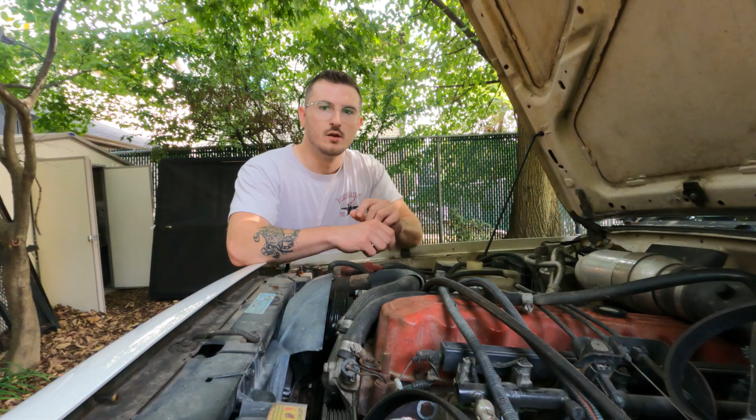So I have always run a super tight belt on this truck. I've had this truck for probably 5 years at this point. The main reason for that is because I am a firm believer in XJs being taken care of, not being shit boxes, looking nice, driving nice, you know, all that. So I put a lot of time and money into my truck.

And one thing that has always driven me fucking crazy is when, and this happened a couple times, I'll be out there wheeling or camping with my friends and people I don't know, people with big expensive Tacomas and 4Runners and all these other trucks. You turn the truck on and boom, there's that horrible shitbox squealing belt sound. Hate that so much. Everyone's turning their heads, oh, whose piece of shit truck is making that noise? A lot of you probably know where I'm coming from. So anyway, not really a big deal, but just something that I just can't stand.

So the easiest solution to that problem was always to just tighten the belt up. I've read a lot online, people run the belts tight. I know people who run the belts tight, so that's just what I've done. I've always cranked these belts down super hard and never had an issue, never had a squeal. Everything was all good. Up until about 1 year ago, when I pulled into camp and my truck sounded like it was going to explode.

At the time, we thought the AC clutch was going bad and that was making the noise. So I pulled that out and replaced it needlessly. That wasn't actually the issue. The issue was the fan pulley was actually cracked and allowing the pulley to flex as it turned and was making a pretty shitty noise. It actually had cracked in between each of the 4 bolt holes and was actually in 2 separate pieces, although the way it broke, it was still held together and it didn't come apart, luckily.

But unfortunately, that was not the case because this fan pulley, unlike my first one, didn't just crack, it literally exploded. Probably can't see this very well. See that thing right there that looks like shrapnel? Yeah, that's not supposed to be like that. I'm gonna take this thing out and give you guys a better look at it. Here it is without the fan shroud on it. Now you can really start to see the carnage. Yeah, that is no good.

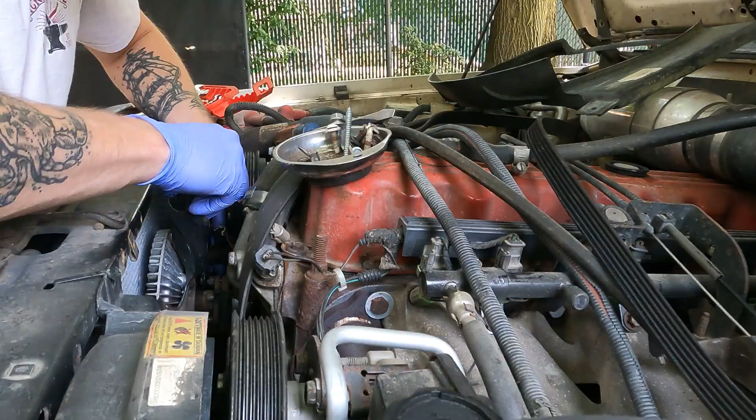Alright, here it is. Ooh. Yeah, actually, very interesting. It looks like it broke the exact same way as the other one did, because the center became detached. Let's see if I can get it out.

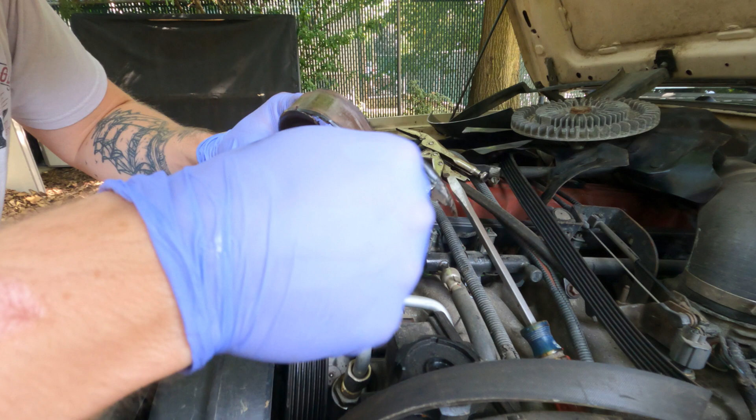You can see that the center sheared the same way the last one did, but this time it failed much more catastrophically and the whole thing just kind of exploded. I'm sure it whipped around, got caught on something, got bent backwards, and that was that. Nope, time to put a new one in.

Alright, so here's the new one. It's not actually new because from what I could tell you can't actually buy these anymore, so this was a used one off of deadjeep.com. Just cleaned it up, hit it with some paint. So you can see the way that these are designed. Your belt wraps around like that, right?

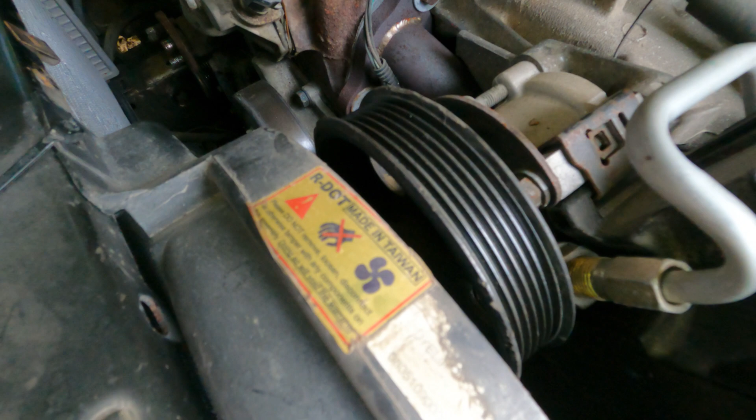And when you tension this belt, your belt is pulling on one side of the pulley, right? So the pulley is fastened here and being pulled this way here. So the rest of the pulleys on the motor, you could see like the center of the pulley is in line with the belt, right? Center is in line with the belt. That one is actually similar to the fan, but

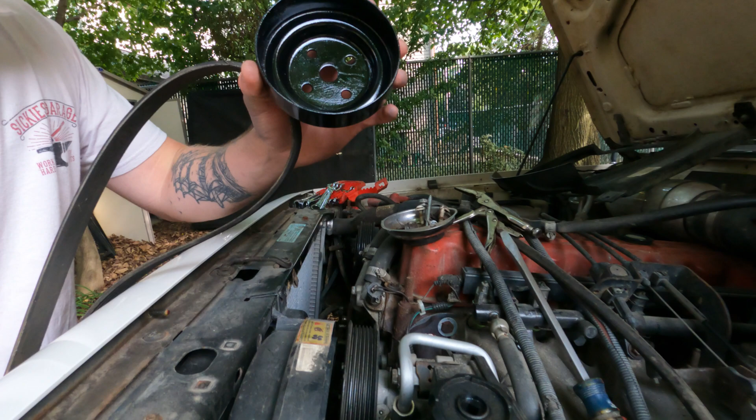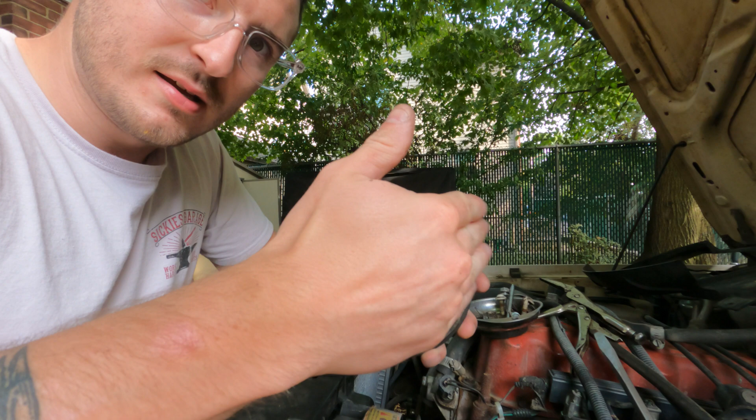the center here is not in line with the belt, your contact surface for the belt is pretty much cantilevered away from where it's fastened, right? You've got like an inch cantilever, so you're pulling on this with the belt, you have increased torque on it because of that cantilever, and you're flexing it. So every rotation you're bending this back and forth if it's too tight, and over time it's gonna break. So that's exactly what happened.

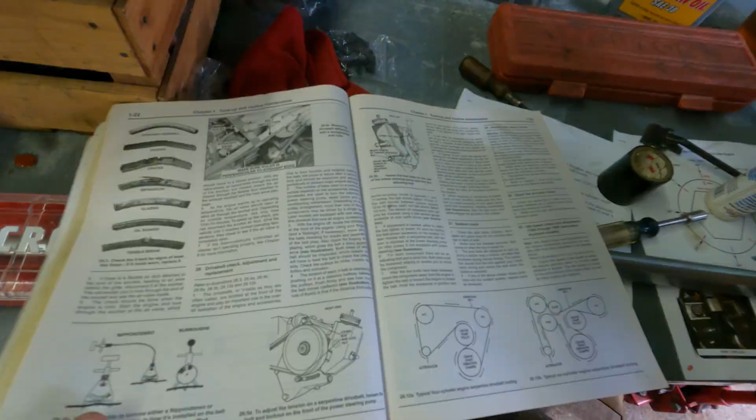So like I said before, if you're not a dummy, you probably didn't need this lesson at all, but learn from my mistake. I'm not going to be tightening this down nearly as much as I was before, and this video wouldn't be much good if I didn't show you guys the right way to tension the belt. So I'm taking it back old school here. Busted out the Haynes manual. So this is what the Haynes manual has to say about this.

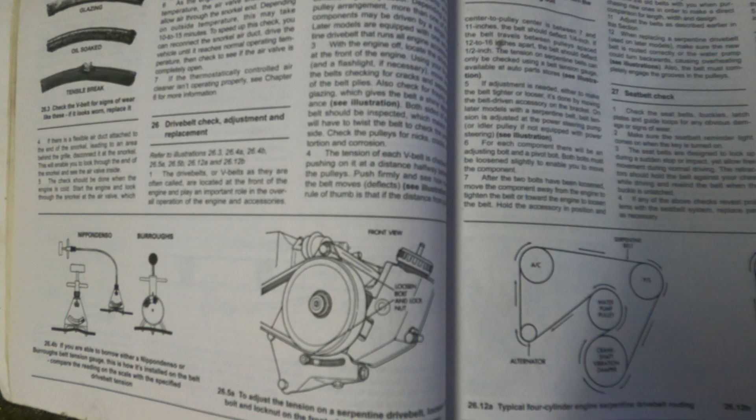The tension of each V-belt is checked by pushing on it at a distance halfway between the pulleys. Push firmly and see how much the belt moves. Alright, so we obviously knew that. A rule of thumb is that if the distance from pulley center to pulley center is between 7 and 11 inches, the belt should deflect 1/4 of an inch.

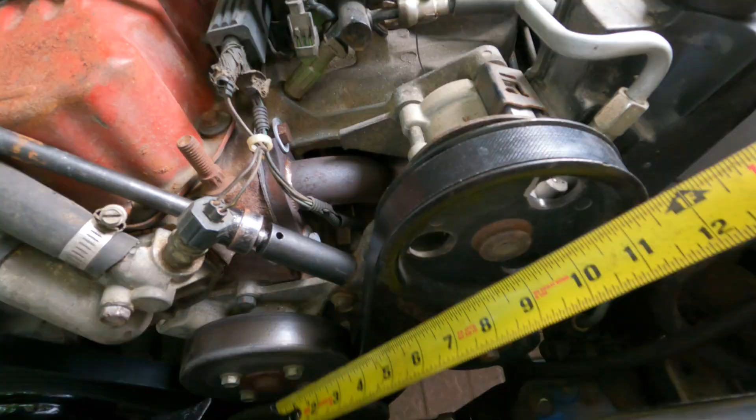Alright, so let's measure our pulley to pulley distance and see where we're at. So we'll go between the water pump and the power steering pump. We're right there at 9 inches. Means at the correct tension, I should be able to push on this and move it about 1/4 of an inch. So I'm going to tighten it up and let's see what happens.

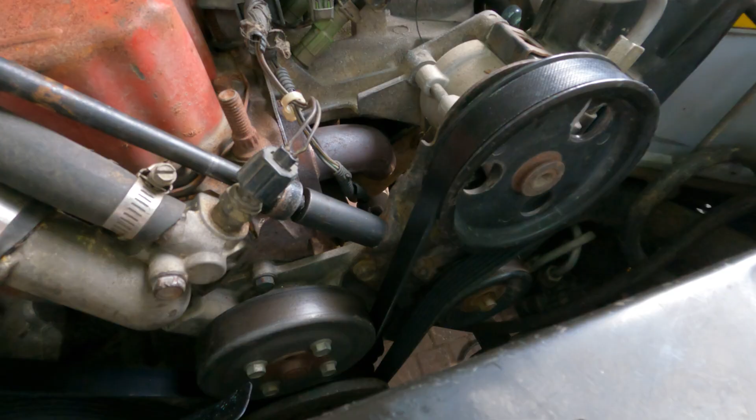Alright, so right now I can still move it much more than 1/4, so we're going to keep going. Guys, I'm going to say about here is probably good enough. I'm pushing without really straining myself, but that's pretty much 1/4 inch. So I'm not going to go farther than that. Learn my lesson. Hopefully this doesn't squeak. If it does, I'll tighten it a little bit, but yep, there you go.